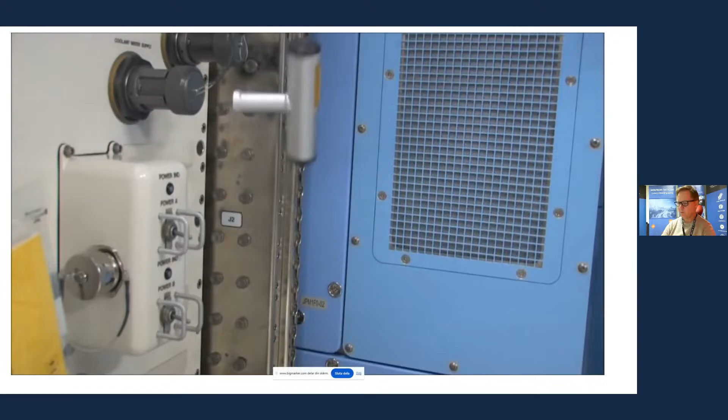This phenomenon, often referred to as the Janibekov effect or the tennis racket theorem, has been known for more than 150 years. Still, for most of us, it defies common sense. What could cause this effect? And can we reproduce this behavior?

Hello, my name is Jon Bruegel. I lead the development of System Modeler. Already as a child, I enjoyed building models. At first, I also built houses and animals of different kinds. Later, I moved on to cars, aircrafts, motorcycles. Eventually, I started building mathematical models instead of using Duplo and Lego bricks.

A few years ago, when I saw Veritasium's brilliant video on the Janibekov effect, the bizarre behavior of rotating bodies, I became curious and wanted to see if I could reproduce this phenomena in System Modeler. I will use this example to introduce the basic concepts of the software.

I actually did a recording with all the mistakes I did, so you will see that soon. My first thought was, what is the quickest way to reproduce this? The multi-body library seemed to be a good starting point.

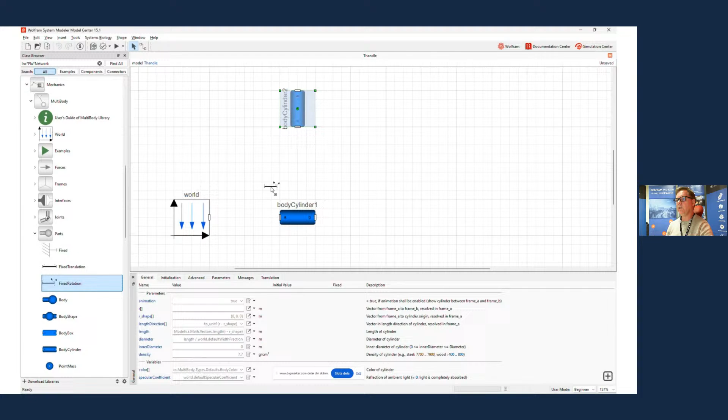Then I added a couple of body cylinders, 3D masses, that I thought together would be nice in order to get a shape similar to a T-handle. And to connect these with 90 degrees, I used this component called fixed rotation. All these from the multi-body library.

Then I started to connect the system. And that's basically it. The only thing I needed to do now was to set the proper parameters for things, like starting by setting gravity to 0, because I wanted to go to space.

Then for the handle, I decided, let's do it big. Doesn't really matter how big it is. I did it 1 meter, so that's basically a yard. And then 20 centimeters in diameter.

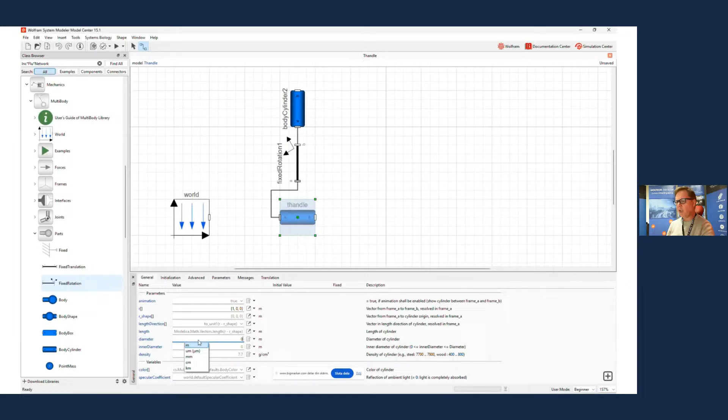Then I went over to this component that was supposed to center the next connection, so I called it center. And I wanted to rotate 90 degrees, so I got the T for the T-handle. So I rotated around the y-axis 90 degrees, and then went to the shank.

In the shank, I set it to half the size of the handle. But I think I decided to set the same diameter—we'll soon see that. Yes, 20 centimeters for that too. And then I realized I forgot to set the distance into the center, so I did that, and now I was ready to initialize the system.

So I had this T-shaped object. The only thing I needed was to get it to rotate to begin with, so I said let's get it to rotate around the x-axis with 10 radians per second.

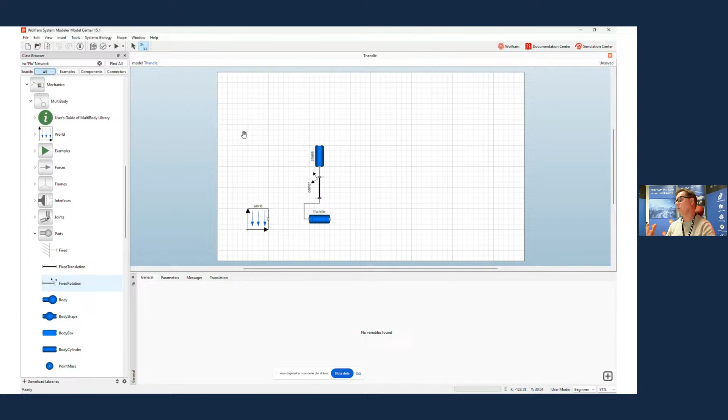And then I simulated. Once simulated, there's plenty of things I could plot—every single variable in the system is available. But what I chose to plot was the rotational speed of the shank.

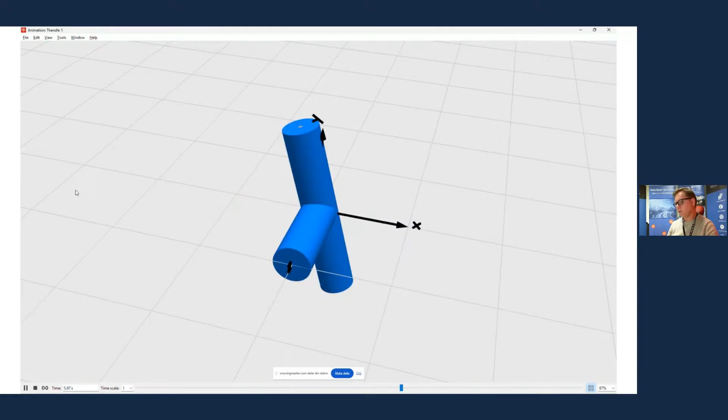So I dug down to find it, W here, and we can quickly see that something is happening, it's flipping. But perhaps it's easier to see if I run the animation. There you go—in just under 4 minutes, actually closer to 3, I had replicated the Janibekov effect.

I got excited, and soon enough I started to throw around all sorts of things: wingnuts, spacecraft, space shuttles, even cats. But then I had to stop myself and say, okay, this is just for fun—let me actually learn something. So I did what people typically do when they're trying to learn the Janibekov effect.

I did a point mass system. So let's look at that. The point mass system, when I did it, looked like this.

So what we can see here, I have 6 point masses, green on this axis here, and the weight is represented by the size. They're really point masses, but we illustrate the weight with size. So we see this is the smallest, then we have the yellow ones, which are intermediate, and the blue ones are the biggest. And these arrows—I'll get back to them.

So I started to plot different things. I prepared a bit of things here. I plotted, for instance, the rotational speed for the center around the y-axis, and x and z, and we can see that flip happening. I could also study things like the kinetic energy, and saw how that was changing for the different bodies over time, but the total was constant, of course.

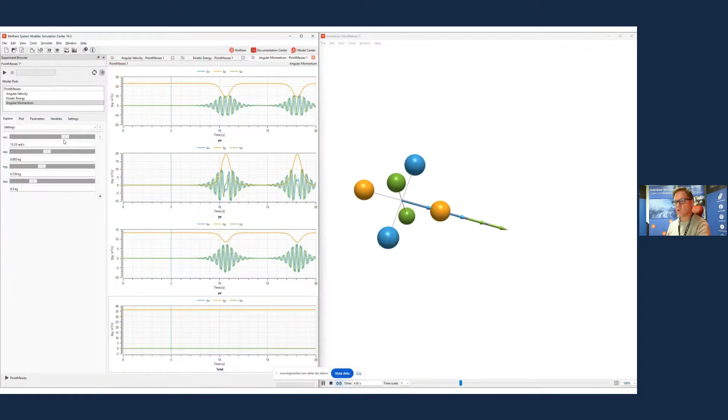And what happens if we make these three weights very similar to each other, but still have an intermediate axis? Well, then it will flip, but later on. But if I increase the rotational velocity, it will flip sooner and more, all with angular momentum maintained.

While this is a simple example, it illustrates something important: even the simplest system can behave in most unexpected ways, especially when you use it in situations where you typically wouldn't be, like in space.

It also shows how you would typically go about modeling your system, whether you want to model some simple system like this, or let's say the thermal management system of the Europa Clipper. It's almost always best to start with the simplest possible model first.

But of course, once you've invested all this time in developing an advanced model, you want to get as much mileage out of it as possible. You would like to use it perhaps for validation, for sensitivity analysis, to look at uncertainties, produce digital twins, and so on.

This is where the combination of the Modelica language, which is used in the product, FMI, and the connection to Wolfram language comes in. These together are what makes it possible to take your model to the next step.

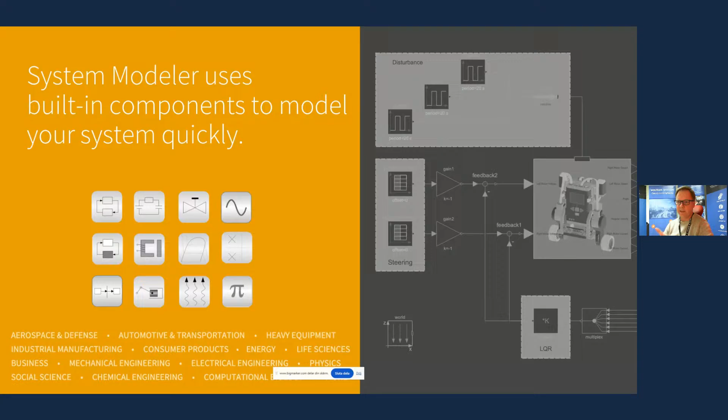So if we go back to the basics, System Modeler uses the Modelica language, which has built-in components to make it easy to get started. So just as you saw me drag and dropping there for the multi-body, there are plenty of different components for different domains.

It makes it easy to create models that you can reuse in different scenarios. Whether you want to use a motor as a motor also, or as a generator, it's the same model. You just connect it, for instance, to use it in a wind power plant.

Once you have your model, perhaps you want to do a system of systems, or you might want to do a digital twin. That's where the functional mockup interface helps you, by exporting into functional mockup units. I know we will see a bit of this during today.

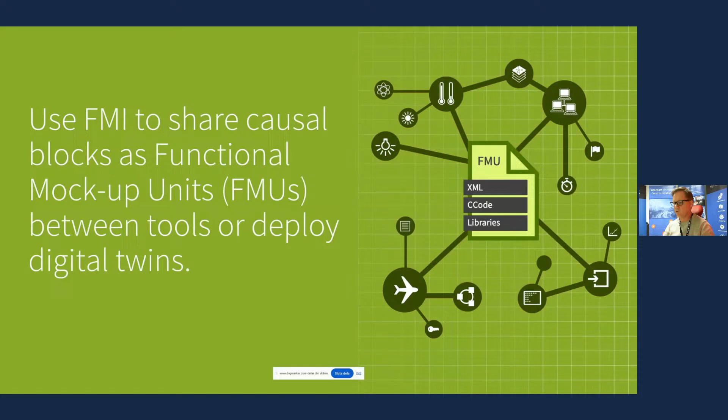So these combined, Modelica and FMI, help you develop systems like, here we have the energy system of Sweden for instance, and we can see some component of a power plant here. But you could also do a battery electrical vehicle with a battery, or a digital twin of an oil drill, oil reservoir, and so on. All this using the two technologies, mainly Modelica, but then FMI once you want to get it out there to other places, or you want to get in something from some other software.

So what happens? What about all the other questions I asked, or tasks I mentioned, like validation and so on? How would I do those? Well, that's where the Wolfram language steps in.

While System Modeler runs standalone, it's actually possible to connect it directly to Mathematica, if you have a Mathematica license, and do a lot of pre and post processing of your models and results.

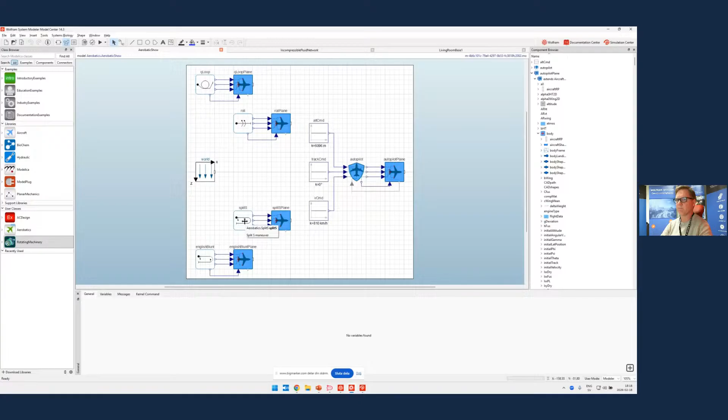I can actually simulate this, let me simulate it again, to make sure that we have the right one running here. So here we simulate this scenario for all the aircrafts, and let's look at how it actually behaves. And there we go.

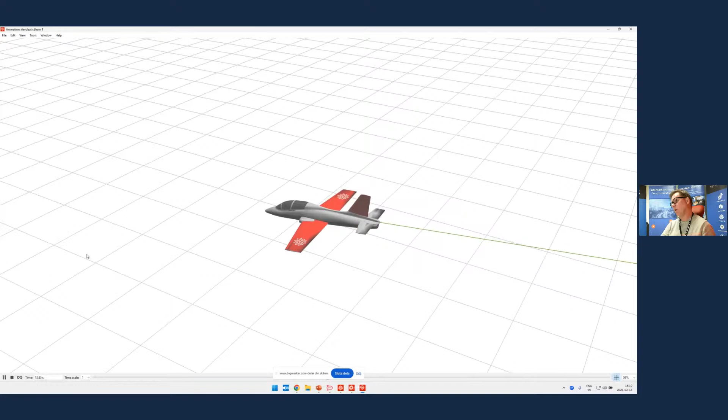We're following an aircraft that is doing a roll, apparently, not the split S aircraft. But this way we can see how it's actually maneuvering around. But do we know that they're actually doing things within the given limits? Well, we're not saying anything about that here. So let's close this, go back to the notebook.

And then what we will do is start by simulating here. I will do one that I call simulation cruise, after Tom Cruise, and one standard. So we have a standard pilot and Tom Cruise here, and they do the maneuver in slightly different ways.

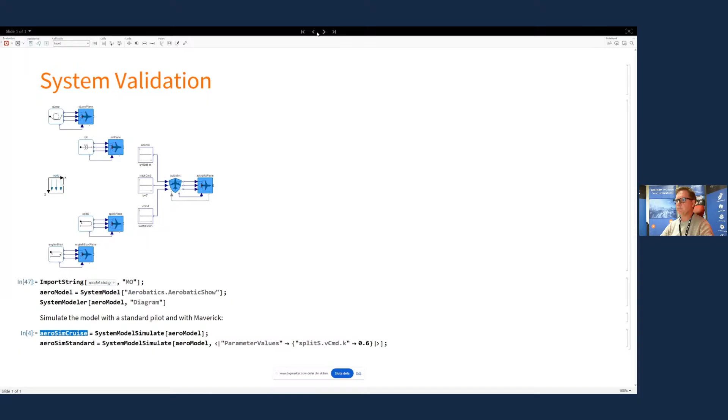What you can do is, in the Wolfram language, you can create expressions for your requirements. So for instance, let's say you have something like the load factor must be between -4 and 8 Gs for the plane performing the split S maneuver. This is just upper and lower bound, but perhaps this is actually a more complicated region, like this one, where you see that, yeah, it's -4 and 8 once you go fast enough.

But before that, you can't cross these limits. So after we have defined a region like this, the question is, can I now use this region to check whether we're fulfilling this requirement of never being outside it?

So we will use a function called System Model Always, and that System Model Always will tell us whether we succeed or not. In this case, we didn't add any probability and so on, so it was just one single simulation, but we could do that, and we'll see that later on.

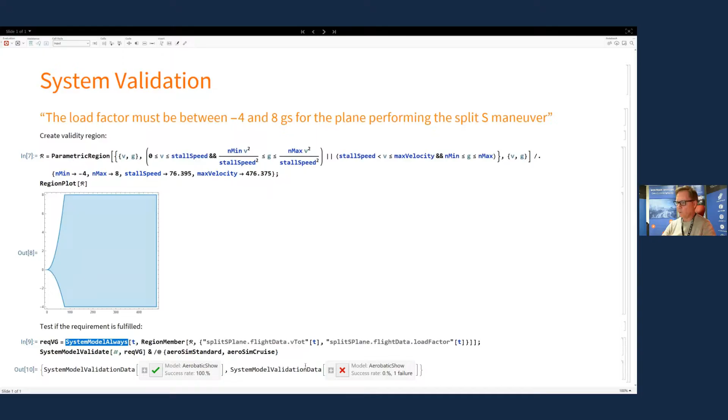So one of these, the standard, was within the limit, while Tom Cruise was outside the limits. But now, of course, you want to see this. Where did this actually happen? Now, let's say you get a big report of different things that hopefully most of them actually pass, but those that don't, you want to study them further.

So here, what we'll do is extract the velocities for VG curves, velocity gravitation curves, for each of the two aircraft, and then plot them together with our region. Now we can clearly see that one of them, the green one, which is Tom Cruise, goes outside the limit. He's pushing it a bit too much. But being Tom Cruise, we know it's okay.

While in the zooming in version here, we see that the other pilot just goes close to the limit before he returns.

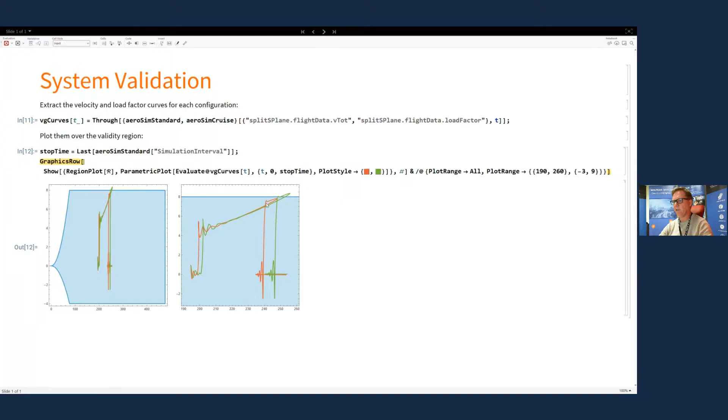So from validation to uncertainties. Most systems, you don't know everything perfectly well, right? There could be different things. So if we have this system here where we have a bunch of pipes and valves and so on, and we want to study that under uncertainties, we can do that too.

So you can design a parameter here that could be, in this case, we're saying this parameter is within this interval. But this could be any expression. It could be a normal distribution or any distribution you want. You say, this is where my parameters, how to define them. They're not one precise value. They could be any of these according to some distribution.

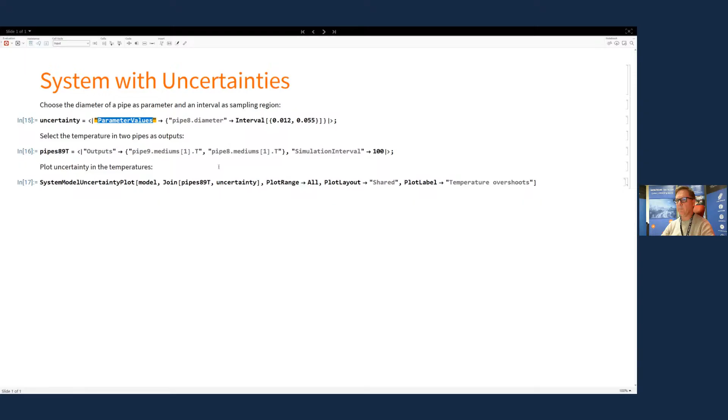And then I'll ask for a couple of outputs here, and let's see what happens. We get something like this that shows what's the median, and what's the actual spread of this. We see that it's quite huge with the distribution we set here. And we're looking at the temperature in two different pipe sections, basically, in this one. So this way we can get a better understanding of how the system will actually work with the uncertainties there is in the system.

Sometimes, so system model is about, you do a mathematical model that with all its simplification, you at least hopefully know what you simplified and the precision you have and so on. But sometimes a neural net is better. Perhaps you only have a bunch of data and want to do a model for that, and you want to integrate it with the rest. Then you can do that.

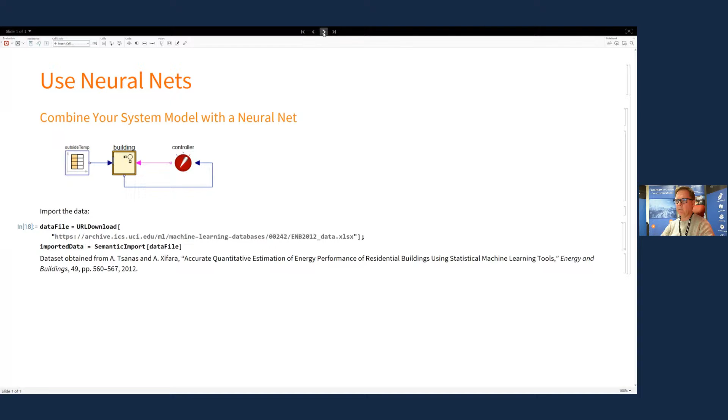Let me just skip forward here a bit, so we have a bit of time for Q&A. But we can see here within the Wolfram language, you could retrieve data, and then once you have gotten your data, you can say, okay, let's use part of the data to train, part of the data to validate. Let's design the neural net we want. In this case, using rectified linear unit layers, and then a method and so on.

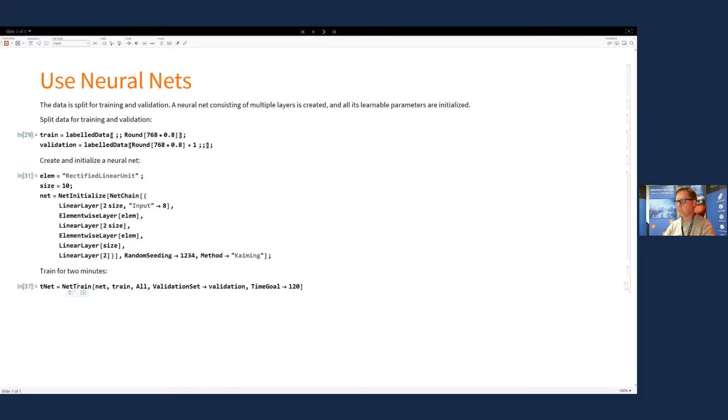And with that, we can do net train. So let me run net train here. Now we are training this neural net, and we can see here the cost function going down. The orange one is the training set, and the blue one is the validation set, which of course is varying more because it's the validation set. But eventually, it's hopefully happy. I'll set it to run for 120 seconds here, but let's stop it now.

So now when we have trained a neural net in Mathematica, we can actually use it within System Modeler. So we generate here a net chain that, with Create System Model, we put it on as a model that we use within System Modeler itself.

Right, and that takes some time, so I shouldn't have run it, perhaps. So there you see, it's coming actually. Let's open again. So here we have a model. I have a missing component, but we can see that we have this neural net that we created, and I can use it with drag and drop as a part of my actual current system.

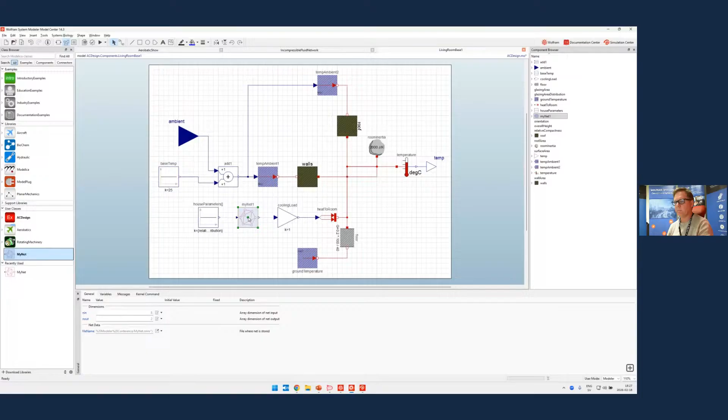And this I can do in any direction. I can use my system model to train a neural net. I can use a neural net as part of my system model and so on. Hopefully that very quick introduction shows a bit of how System Modeler is. You begin with drag and drop, simulate, get some understanding, and then depending on where you want to go, you can use the Wolfram language to get deep down into validation, for instance, or looking at uncertainties and so on.

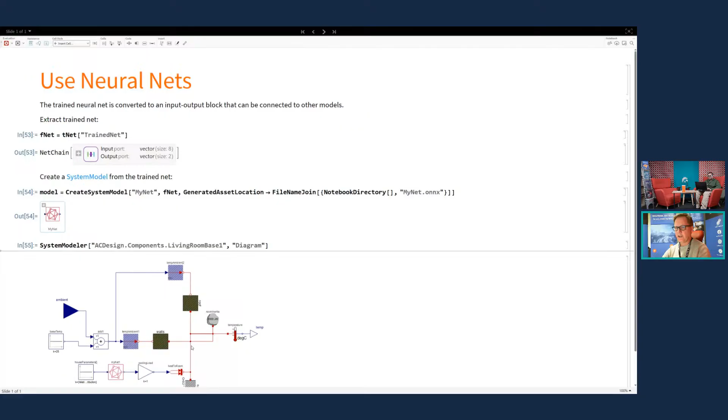I think there's a good starting point. Let's see if I can open a web page quickly here, on Wolfram.com, System Modeler. We can find it on the resources, and then the core components section. So here are basic Modelica, for instance. Let me click on that, and you will get what is Modelica, why should I use it, and from there it will point you to other resources, including introductory courses and so on. Similarly for FMI and the Wolfram language.

The next question was, what did you mean by causal blocks? People think that Modelica is only for acausal blocks, so can you make that a bit clear? Modelica doesn't care what's input and output, which is called acausal. We don't care when we build the component how we will use it, whether we will apply voltage or current to it. That is decided when we actually use the component. However, in many other software, you need to define this is my input, this is my output, and that's a causal thing that says okay, this causes that. This is why FMUs, the functional mockup units that you export, are causal, because they need to work even in tools that do not have the capability to handle acausal systems.

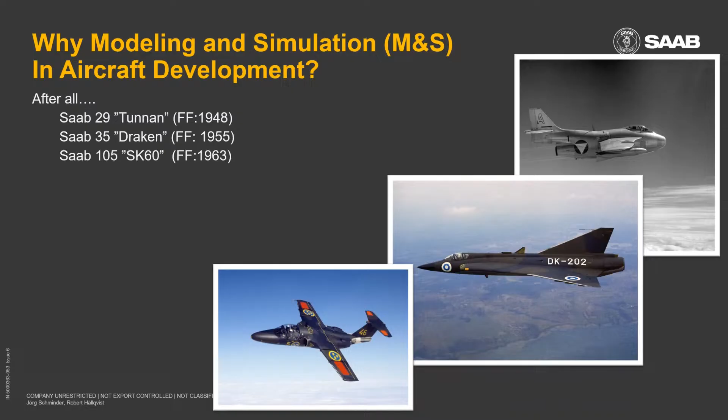Before pointing out what has become different, let's just use general vehicle systems as an example. These are general vehicle systems, which both I and Jörg work with—general aircraft subsystems that exist in both military and civil aircraft: cooling systems, hydraulics, fuel systems, etc. Nowadays, we classify propulsion systems also as a general vehicle system.

Today, they typically consist of both complex hardware and software parts. They are tightly integrated with the aircraft as a whole and highly connected to one another. Each subsystem is designed to solve a number of different tasks. And this is largely one of the reasons why we need to use modeling and simulation during development, in order to not only cope with emergent behavior that arises when these different subsystems interact, but also to exploit them to make a better product in a safe way during development.

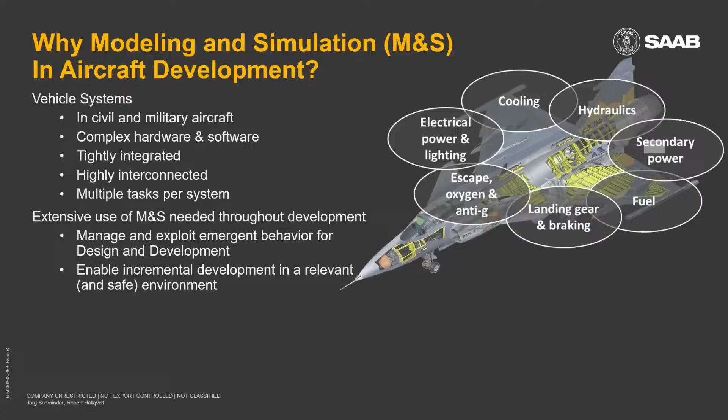So when using models for development, we adopt a distributed approach. And with that, I mean that the models are developed by the parts of the organization that are responsible for also developing the subsystems. The engineers developing models can be spread throughout the organization, and they are prompted to use the best suited domain-specific tool at hand to develop their models.

We strive to make simulations, models, and simulators available to all engineers that need them throughout all the life cycle phases. And we employ modeling and simulation on an increasing system level throughout development, ranging from component to subsystem to aircraft and systems of systems in the end.

Here we have a schematic representation where I put some sort of abstract measure on the vertical axis representing level of integration—so, in a sense, how many of the different subsystems are integrated in the simulation. And on the horizontal axis, we have some abstract representation of time. Here I wrote early phases and late phases. That does not mean there are no even later phases, such as operation—this is an undefined boundary, I should say.

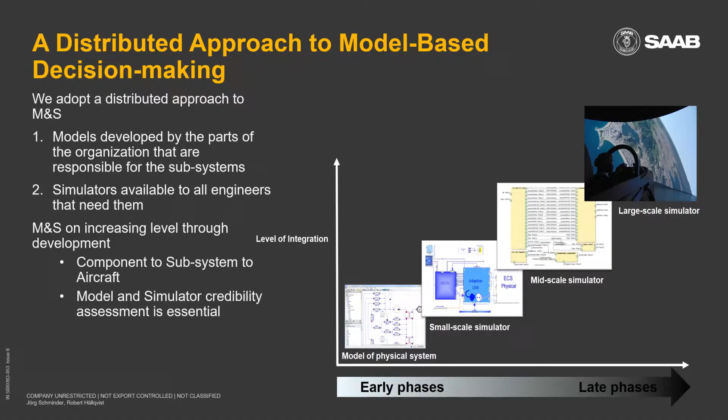But if we are to work this way, then credibility assessment as an umbrella term becomes essential.

So when developing a new aircraft vehicle system, we typically start by modeling the included hardware. And I myself, I am a Modelica proponent, so I would develop this model using Modelica and various different Modelica tools. But as I mentioned earlier, we strive to use the best suited tool for the task at hand. So when developing this model of the hardware, we do a lot of simulations to mature the model and to specify the hardware to be included in the subsystem and so forth.

We use this model for safety assessment, performance analysis, load analysis, etc. Here I try to indicate that we are using the model throughout the lifecycle phases. In the late lifecycle phases, we heard Jan talk about digital twins, and this would be a potential digital twin prototype in this early phase.

Once we feel that this model is mature enough, we develop a corresponding controlling software, and we integrate the hardware model together with the software in what we refer to as a small-scale simulator. When I say simulator here, I mean the complete architecture, including the models, but omitting the actual simulation engine, the tool driving the simulation forward in time in case of time domain type simulation. So here we have a small-scale simulator incorporating the hardware model and the software of a single subsystem model or of a single subsystem.

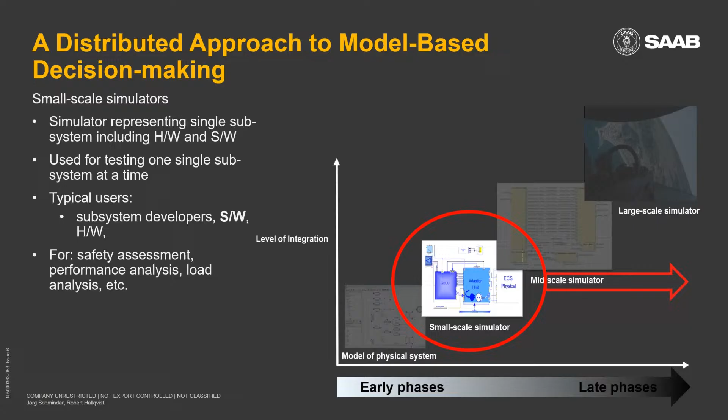We use this type of simulator for the same purposes as the hardware model, to develop the models and the software, to do safety assessment, performance analysis, etc. We run a lot of simulations, and once we're mature here, maybe we develop a mid-scale simulator where we incorporate several different closely related subsystem models and their corresponding software. We use this, for example, for architecture evaluation on a higher system level and a more holistic performance analysis. And lastly, we go to our large-scale simulators.

These include most of the modeled aircraft subsystems. We have an ambition to be flexible here. We have full desktop type large-scale simulators, as well as hardware in the loop simulators. These types of simulators are typically used by pilots and a number of different subsystem developers, and they are also shipped as products for training purposes, etc. But in-house at Saab, we use them typically for integration testing, fault analysis, and evaluation of the behavior of the complete aircraft.

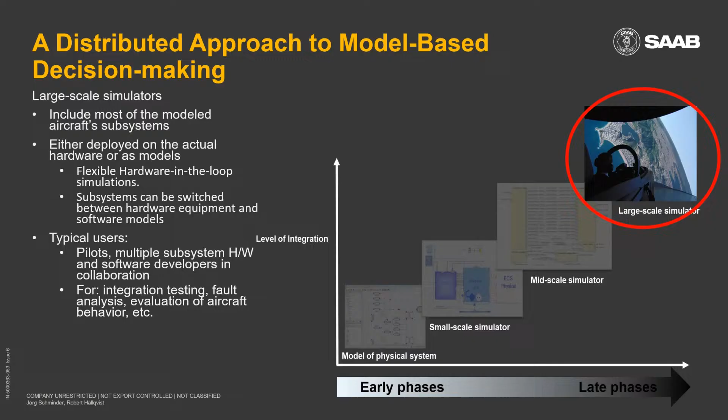So with this very distributed approach, we need to have tools, methods, and processes to enable efficient reuse of all the digital artifacts that go into these different simulators. Some of the strengths are that the subject matter experts have direct input on every digital artifact, and all of these subject matter experts are typically dispersed throughout the organization. So this distributed modeling approach is a prerequisite for this to work.

Using this ambition to let the engineers work in the best suited domain-specific tool enables an efficient use of human capital, in the sense that a modeler can switch between development projects without having to switch or learn a new tool. So this is also very important in this approach.

As I mentioned, we do need mechanisms for efficient distributed credibility assessment, meaning credibility assessment as an umbrella term. To realize this, we need to use well-established interoperability mechanisms, standards such as Modelica, FMI, and SSP, which I will talk about in a little bit. And we need to have mechanisms to establish and communicate digital threads. As we use these large-scale simulators or products, we need to be able to declare them as test-worthy.

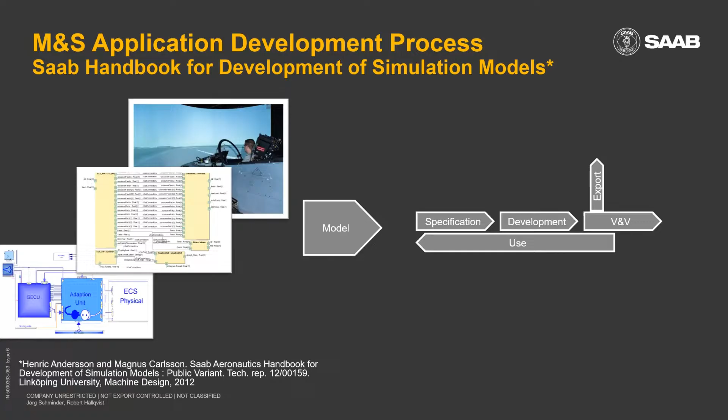We formulate a verification and validation plan, etc. Then we go into the actual model development, where we connect component models into a subsystem model. We do verification and validation. We get feedback to refine our specification, and once we're ready, we export the model to a central model storage. Once in the central model storage, this model can be integrated in a simulator at whatever level. At this very coarse way of describing the process, one could express the development of simulators in the same way as well as component models.

Jan mentioned FMI. FMI is very important in this workflow. FMI is a result of the EU-financed research project MODELISAR, as far as I know. Basically, FMI specifies a generic format for export of model executables, or so-called functional mockup units. This can be done in a few different ways: FMUs for co-simulation, where a numerical solver is incorporated into the model package, or FMUs for model exchange, where the solving of the equations is left for the integrating tool.

And it provides various means of protecting IP in different ways, in terms of source code export, gray box, black box, etc.

FMI also provides a standardized interface description in terms of an XML schema. So FMI targets this export step of exporting models for integration in simulators. But we had what I refer to as simulators on various different levels.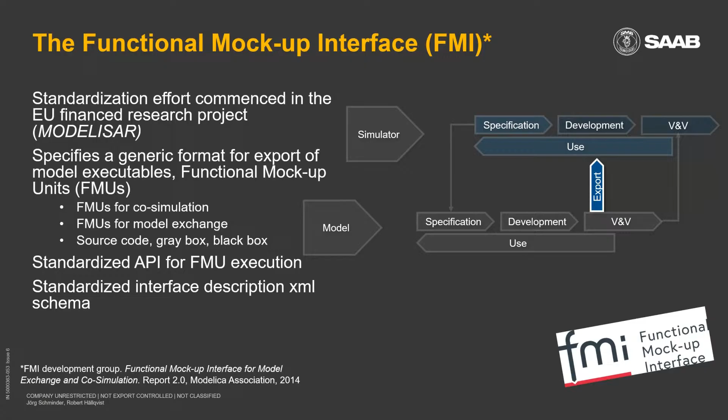And that is, for example, one aspect that the system structure and parameterization standard addresses. SSP is a portable zip file format, just like FMI, that contains everything needed to execute such a simulator.

Just to advertise the latest version of the standard, SSP 2.0 was released slightly less than a year ago. This latest version is primarily intended to keep up with and address FMI 3.0 functionality, but it also provides some nice mechanisms to support incremental development of simulators and architecting.

In SSP, we use 3 of the primary artifacts that SSP specifies. We use the system structure description file format, which captures simulation architecture, how one model is connected causally to another model. The system structure values file format, which is a container for parameter values. And the system structure mappings format, which is a file format that allows you to customize the mapping between values and model components.

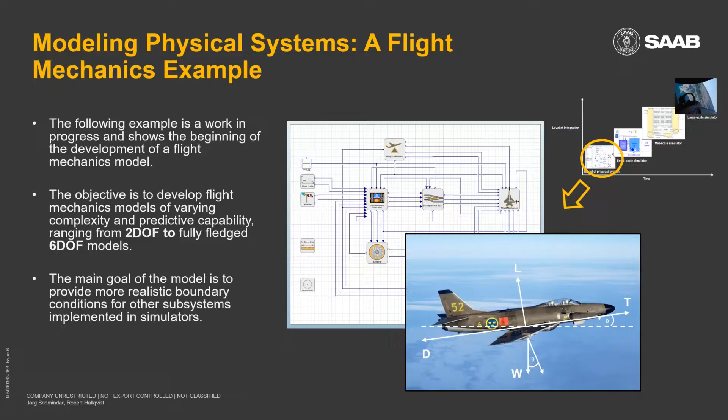So if we go forward please, Robert. Next slide, yes. We are working at our department, like Robert mentioned already, with system simulations. However, what he didn't mention is that our focus is very much also on conceptual design of these subsystems.

And here we are working very closely with our colleagues from the aircraft conceptual design department. And why I mention this - they are actually designing, you could say, the outer part, while we are designing... what does this mean? When we look at military aircraft, you see...

Jörg, you're cutting out. We lost your audio. Can you hear us? Hello Jörg, we are not hearing Jörg, Robert.

That's actually what we try to achieve with this model. So what we are doing is we're building up... there we go, was I away? We lost you for a little bit, Jörg. Okay, sorry.

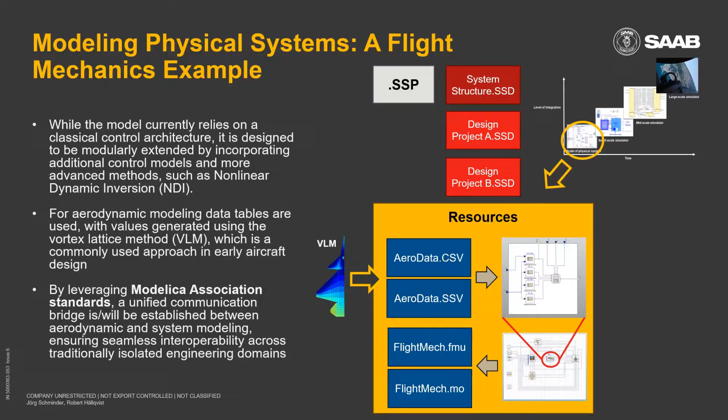So what we have in the current model is a very simplified engine model. However, later we want to have a model providing much more precise, more detailed data than what we have now.

And what we can use here is the same approach on the engine side. You can have different engine designs, engine design A and B, and all these models are using the same structure as we are doing with the flight mechanic model.

What you can do is use, for example, the engine file exported as an FMU in our flight mechanic model instead of the current model which we have implemented at the moment. So that's basically the idea, and hopefully that gives you an idea how we create this modularity and how we want to share files within this simulator which we're developing.

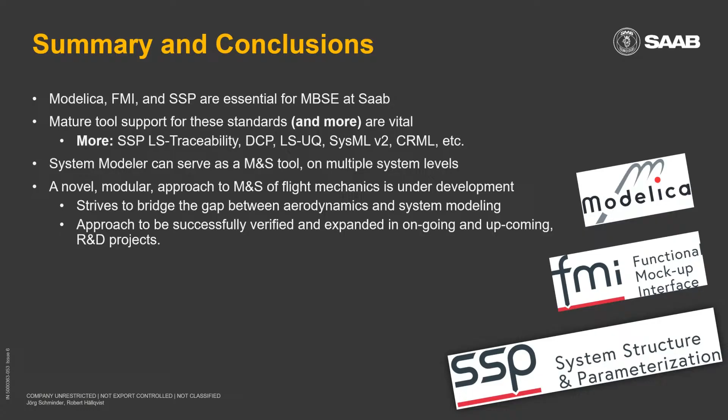No, I think we're a bit short on time, so I can wrap up with a brief summary. Our goal with this presentation was to highlight the importance for us of Modelica, FMI, and SSP, and the Modelica tools supporting all these three standards, such as System Modeler.

There are other standards that are very relevant, emerging quickly under the Modelica Association. For example, the digital thread, and the SSP traceability specification, which provides really nice mechanisms for this.

We see that we can use System Modeler on a number of different system levels, so that is great. And also, what Jörg showed is a novel, from our perspective, modular approach to modeling and simulation of flight mechanics. The idea is that we really try to bridge the gap between aerodynamics and systems modeling.

And our plan is to successfully verify and expand on this approach in both ongoing and upcoming R&D projects. Thank you. Any questions, if we have time for that?

Thank you, Robert and Jörg. It was inspiring to see how models are used across so many different teams at Saab, enabling collaboration across diverse domains. We don't have time, but I had one question I'm very eager to ask you.

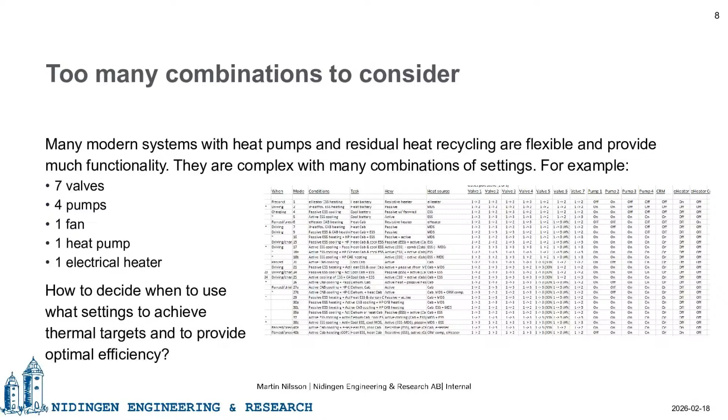So what to do? Well, if you look at all these details at once, you quickly become very lost, very quickly.

One solution is to segment the model buildup, meaning you have different levels of detail in your model for different project tasks or phases. I don't build one model of this particular thermal system for this particular vehicle—I build a family of models which I use, and I use different members of this family for different tasks. Usually the simpler models early, when you have more concepts to develop.

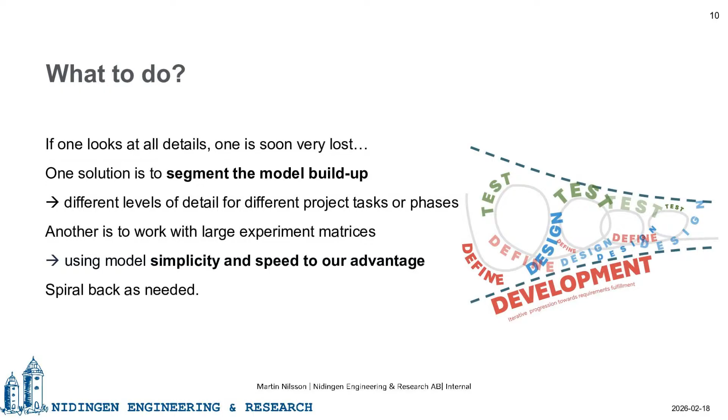So how did we do it? We created 2 new fluid libraries because I work with thermal systems - a lot of fluids, coolant, liquid, and air, incompressible air in this case. So we don't have to do any fancy stuff for compressible flow, high Mach number fluids. We created 2 libraries, and decided to call them thermofluid and flow. The names are almost arbitrary.

We created them from scratch. We had a new interface definition. We created new media models based on the structure we wanted - I will show you some examples. We created a full set of components.

As a design principle for these libraries, we used limited extends in Modelica. You can extend forever if you want, but we use limited extends, and we don't use very many partial models, which goes contrary to the software engineer's thing that you should reuse, make maintenance easy, and bug fixes only in one place.

Since not everybody will be expert users, we created these models from the perspective of ease of understanding and ease of reviewing. If we introduce a bug, it's possible with this approach it will actually be in multiple places, but most of the code is very similar in each component, so it should be easy to find. We do that because having an overview of almost the complete model at once actually helps debugging and introduction to Modelica and ease of understanding this library. That's why we chose that as a guiding principle when we wrote the libraries.

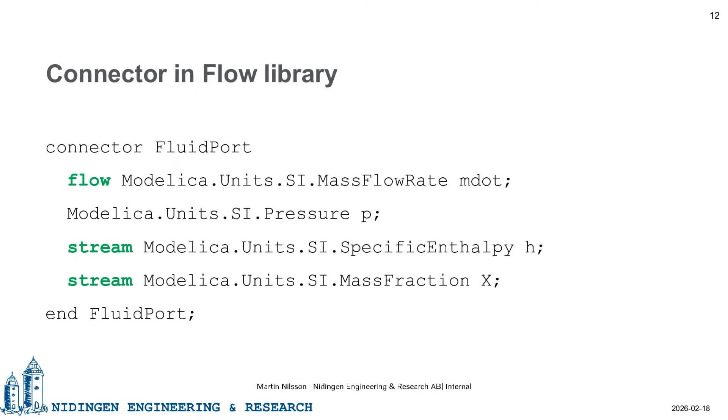But in all practicality, you can use x as almost whatever, depending on how you write your media model.

The media model is written according to this principle. We created first a template, and all functions have a name like property, underscore, and these are the input variables. For the flow library, we take pressure, temperature, and the variable x as input. Whether we use them or not, that's really not the question here - that's what each function needs to work.

And then we create a template, and then we extend that template. For liquids, we typically populate it directly with equations for the fluid properties - in our case, different versions of ethylene glycol. Some of them are hard-coded and don't use x because they're hard-coded for a certain glycol concentration.

Some have X as an input, and then you can vary very easily without changing the media. You can vary the glycol concentration.

For ideal gases, we did a little different approach because a lot of gases you can use the same set of state equations and just change the coefficients. For example, when you define viscosity, you use Sutherland's law, and they have the same type of coefficients regardless of the gas, if it's nitrogen or air or hydrogen, for example.

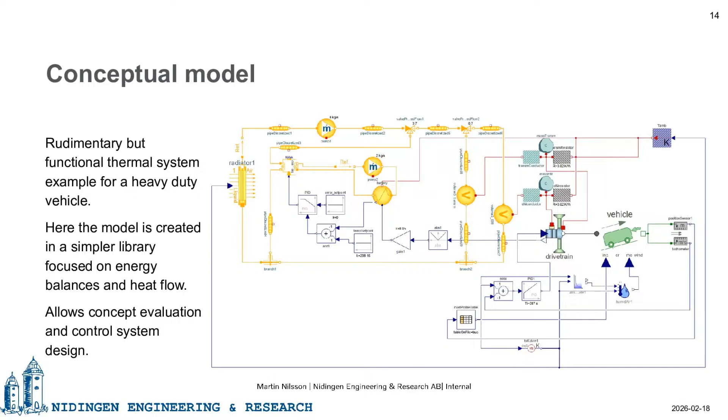This conceptual model I ran in a drive cycle, because I have a drivetrain and a vehicle model, so I can evaluate in a drive cycle. It does require that I first created a conceptual control system, because otherwise my thermal system won't work. Without the control system, it will work in manual mode or steady state modes only.

So before we actually do the drive cycle, we create a large test matrix with thousands of points, and then we do something called a system characterization, or I create data and hand it over to my control system team members, who use that to perform a system characterization, often using Simulink, who has tools for this, and not in Modelica.

And then from that, they define a control system. They define the system from the control system point of view, or we decide to do a hybrid approach and maybe use this data to train an ML algorithm.

We did show in an advanced engineering program last year together with Wolfram that it was possible actually to train, using data from these models exclusively, to train an ML without any different control functions, just an ML algorithm, a neural net created in Mathematica, to control one of these systems over a 4-hour drive cycle in for various times of the year, meaning different ambient temperatures.

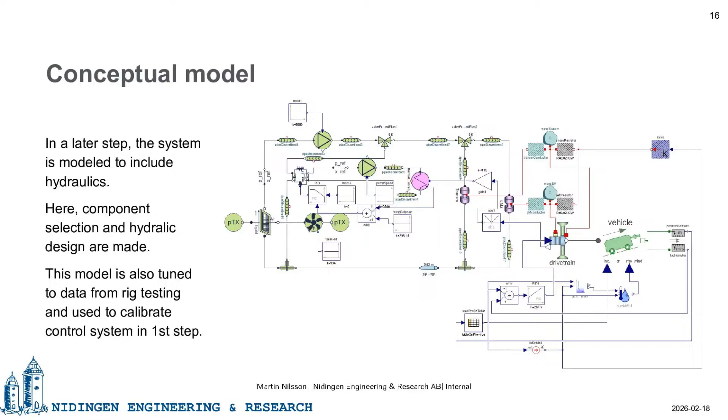So to wrap things up, to provide a couple of minutes for questions: no model is perfect. So we utilize a stepwise approach, a tiered approach if you want, where we add detail as we go along and as we go back and forth. You can see it as a pendulum or as a spiral, in my view.

First, to down select concepts, we run huge DOEs, tens of thousands of cases. We haven't really gotten to tens of thousands yet, but maybe 1,000 - that's where we've gotten so far. We're developing a new workflow as well, to do system characterization, train algorithms, or something else. And we add detail as we go, and then we start all over.

Thank you very much. I'm ready for questions if you are, on the Wolfram side.

Thank you, Martin, that was a very interesting presentation. We have a question: why did you make a difference between energy flow and heat flow in your slide?

I think that was just a wording thing. What I convect - if you mean in the yellow library, or actually the green one as well, the flow library - what's being transported is enthalpy. And energy can be heat, if you put it that way.

So we'll take a simple case. We will have a low tank receiving flow coming from a sewage network, so wastewater flow, very variable. We want to bring it to a wastewater plant located higher, but we don't want to bring the whole flow there. We want to bring up to 2.2 cubic meters per second. The excess flow, which happens usually during rain, we will send to another treatment, which is a bit lower.

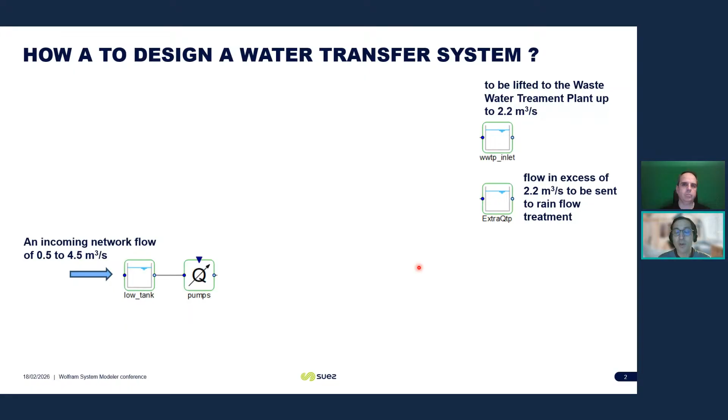For this, we need some pumps to lift the water. We need a pipe network. We made here a long pipe, 2.5 kilometers, and some short pipes here. We need something here because most of the time we want these circuits to be closed. Only when there is the rain peak flow do we have water flowing through this circuit. So we need a control valve.

At this stage, it looks like a Modelica System Modeler diagram, and it eventually is. At this stage, it's not real pumps or real valves, just ideal flow sources. So we have, I would say, a kind of architecture, but not a design yet. And Pedro will tell you more.

With these simulations, we can address one of the most critical design decisions in water conveyance: the selection of optimal pipe diameter, pumps, etc. This decision is inherently multi-objective because it's a balance of competing criteria like hydraulic performance, construction costs, environmental footprint. For instance, in hydraulic performance, if pipes are undersized, head losses increase, discharge pressure at the pumps rises, energy consumption grows.

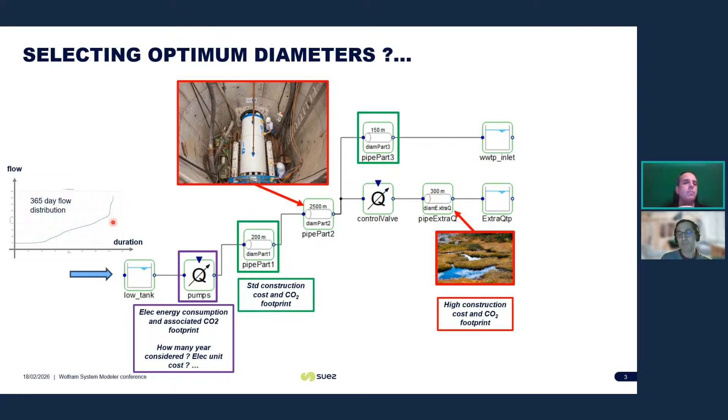Talking about multiple objective optimization with System Modeler: to select the optimal diameter, considering all these inputs, we use System Modeler coupled with Mathematica. The model includes a time-dependent flow table, which we already saw as an object, representing the long-term flow distribution. This flow profile feeds both the pumps and the control valve mentioned previously.

We then load the simulation into Mathematica to run the model thousands of times using an automated optimization workflow. The objective function minimizes TOTEX, which includes CAPEX (construction costs), OPEX (operational costs, mostly energy consumption), and CO2 footprint. This is a multi-objective optimization problem solved through parametric sweeps and search algorithms that converge towards a Pareto optimal solution.

The resulting optimal design is, well, it's kind of obvious and at the same time interesting. The long micro-tunneling pipeline on this example converges to a small diameter because of construction costs. On the other sections, the lower differential cost converges to a larger diameter to reduce energy consumption. So it finds the balance in an expected way on this example. Moving forward.

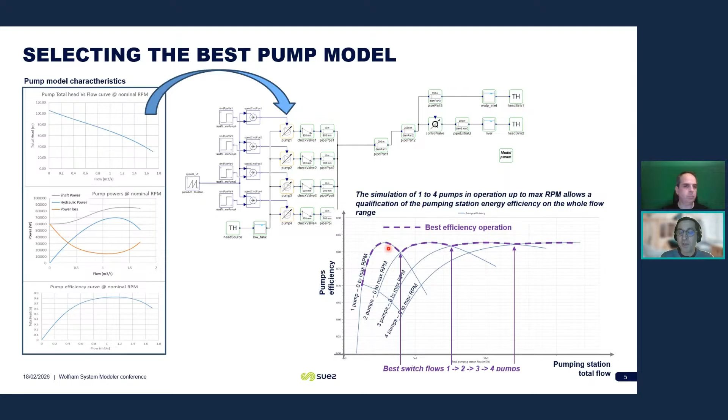So now we have a pump model. It's quite okay. We are quite happy with this efficiency.

After selecting pumps and pipe diameters, it is typical to perform transient analysis on the system. We simulated a critical scenario, typically all pumps running at full speed and a sudden stop due to power failure. For this presentation, we use a simplified rigid column model, not elastic pipe behavior, but we do include pump and motor inertia behavior. The pump, at a given moment, becomes a dissipative element after shutdown.

The results show that immediately after power loss, pressure downstream the pumps, shown in red, drops rapidly from about 6 bars to subatmospheric pressure. This occurs because the 2.5 kilometers of water column moving forward along the pipeline has strong inertia, so water continues moving while the stopped pumps become a restriction in the system. This can lead to pipe collapse.

Unfortunately, it does happen. Pipelines are quite robust against pressure from inside to out, but when submitted to negative pressure, it's quite easy to implode them. So this is a major risk that we must mitigate.

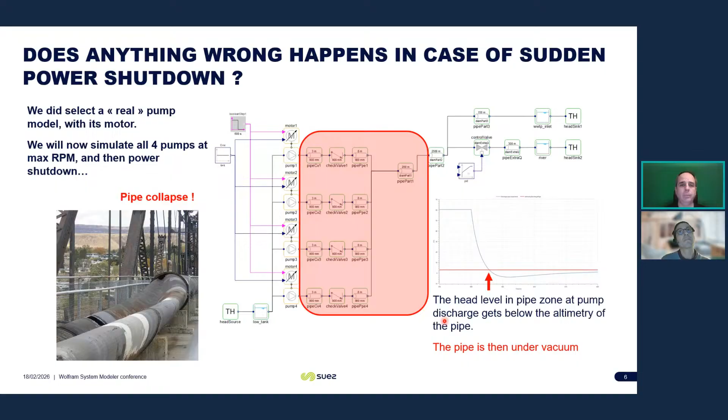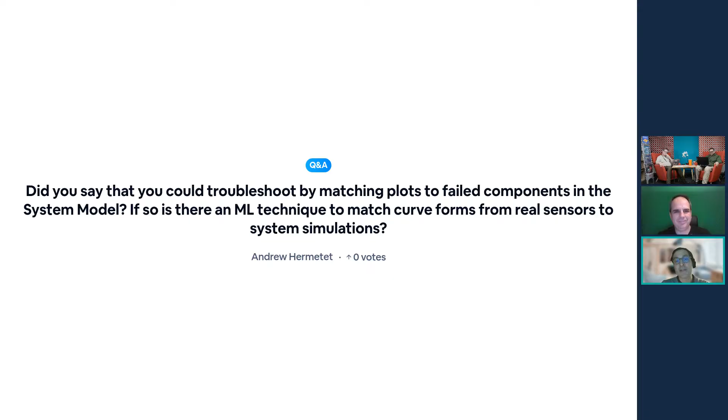We did not try that at all yet. It would be interesting actually. These days, I would say we are designing plants with these systems. These plants will be built, but it always takes time - several years for the project to be built and commissioned. In a few years, it will be very interesting to compare if what we did during engineering phase matches the reality of the site and recalibrate things. But at that stage, we did not do that yet.

Right. And which criteria did you use to place your surge tank on the right of the pipes or to the left? Well, Pedro, maybe you can answer this question. Yeah, I was typing it right now. I mean, the location, if you mean the location.

It's common engineering knowledge from water hammer transient analysis that we should continue the supply of water closest possible to the point where there has been a shortage of water. So in this sense, it's to approach the vessel to the pumps, which are the elements that change their condition upon power failure. If we place it further away, we are going to have the phenomena developing until it finds the vessel, and so we end up with two oscillation systems, one upstream of the vessel and another one downstream of the vessel.

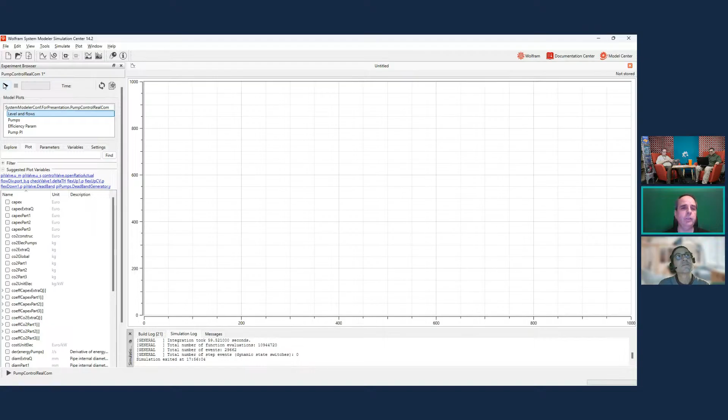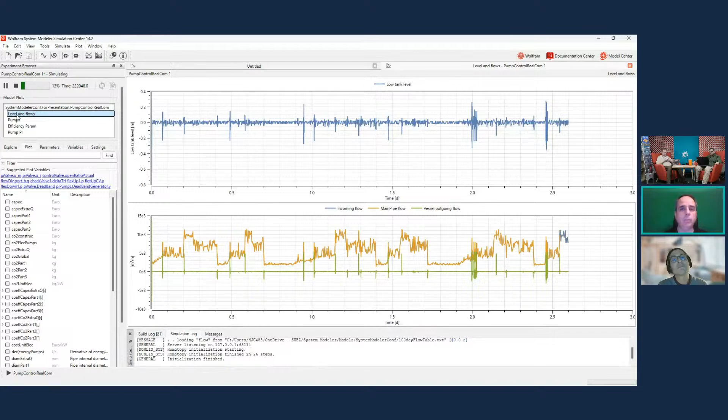So in a sense, could I put it like this, that you are using notebooks as playgrounds for other users? Yes, well, other users - the community is very restricted, so we don't have a lot of multiple users. But yes, it opens the possibility, as you said, to use it as a playground to operate on the models as, let's say, a power user.

I had a thought you could easily use Wolfram Language to identify some thresholds. I see your plots have so many fluctuations, and if you want to automatically identify which set of parameters are within a threshold and which are going out, so you could easily find those scenarios. Do you use some kind of workflow for that, to automate validation of your systems?

We did, most of the time. Actually, we look at the plots and we find quite quickly the issues. But we did things where we wanted an automatic optimization with Mathematica. And then, of course, we need to define a variable that represents the bad thing. This variable is typically an amplitude of oscillations or anything. We have to quantify this thing we don't want, to ask Mathematica to minimize it, working on all the parameters.

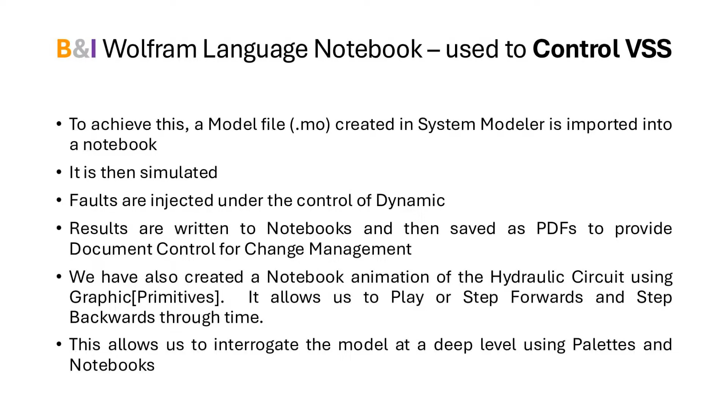The B&I validation solution led us to what we believe is a novel and important concept using digital twin instances. The ISO definition of validation can be boiled down to the question: how do we know the system fulfills its intended function? That is, does the system do what it is supposed to do?

Validation is normally conducted by review, factory acceptance testing, systems integration testing, and commissioning. But what if we could extend validation into real-time operations?

We therefore built our service around the notion of simulation for verification and Sentry for validation. Both use the same basic virtual system simulation, but this time the Sentry is connected to the actual thing, allowing us to validate in real-time, which changes the paradigm.

In B&I simulation mode, we use the standalone VSS. It enables us to conduct design iteration, performance optimization, time-stamped fault injection, reliability and sensitivity studies. In addition, it supports operator training and real-time diagnostics.

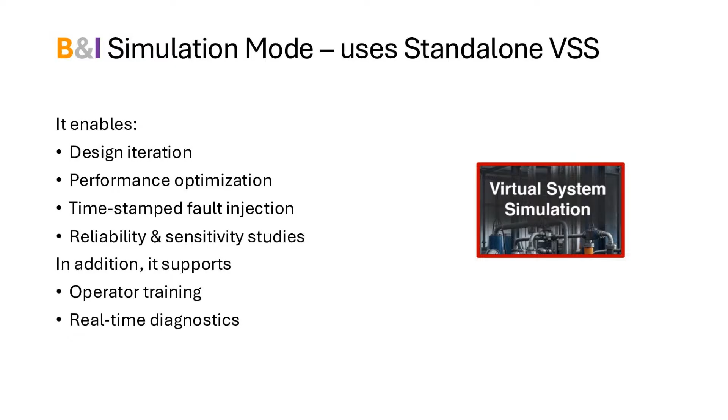In B&I Sentry mode, we use a modified version of the standalone virtual system simulation. Synchronization is achieved by embedding a Wolfram OPC UA client in the VSS, which allows us to ingest live data like valve positions, pump speeds, pressures, and so on into the model.

This allows the operator to conduct real-time validation, for example, by comparing actual sensor data with our digital twin predictions. This means we can detect and alarm anomalies in seconds, both locally at the rig and in a real-time operations center.

So the challenge is: could B&I build a technology stack capable of meeting the following requirements? We need to do parameter synchronization of valve positions, pump speeds, and so on, and system state representation, which must allow us to simulate nominal and fault states.

It should visualize the hydraulics and mechatronics using 2D animations, allow bidirectional simulation communication, analyze system performance, and auto-report when deviations occur, and it must generate actionable insights.

We must also be able to deploy multiple instances in parallel on our client's network, and finally we need to aggregate, analyze, and visualize fleet-wide big data from the simulations and from the actual systems.

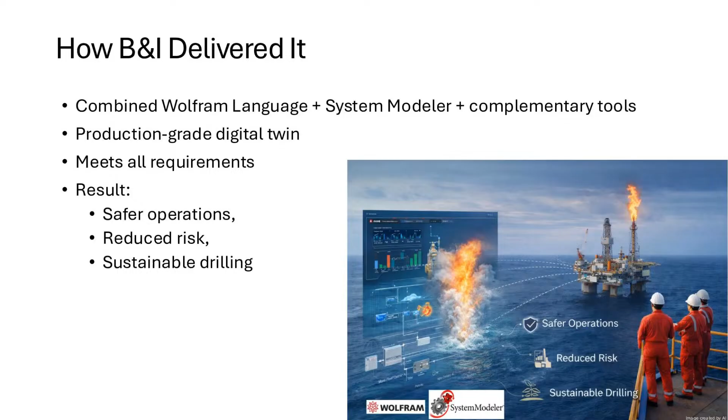So up to now, I've described what's required, but the next few slides presented by Konstantinos explain how we developed and delivered a client-facing solution that will be deployed either as a Dockerized product installed on the client's network or perhaps as software as a service. We combined Wolfram Language, System Modeler, and complementary engineering tools like .NET into a production-grade digital twin platform where Wolfram Language sits on top as the orchestration and analytics layer, handling automation, fault injection, reliability calculations, reporting, and parameter studies. The outcome, we believe, is safer operations, reduced risk, and more sustainable drilling practice. So I'm going to hand over now to Konstantinos.

This model must be computationally efficient and numerically stable when operating in simulation and sentry modes. To verify the model meets the requirements, we validated simulation results against system integration tests for normal operating scenarios. After understanding the failure behavior, we performed optimization and calibration. We adjust parameters, test sensitivity, and evaluate how robust the system is against uncertainty. Our ultimate goal is to use the new tunability analysis framework in FMI.

We have found that a critical step is initialization. The model must start from a steady-state condition with no artificial dynamics. This systematic approach to build, simulate, verify, optimize, and calibrate transforms a model into a safety assurance tool.

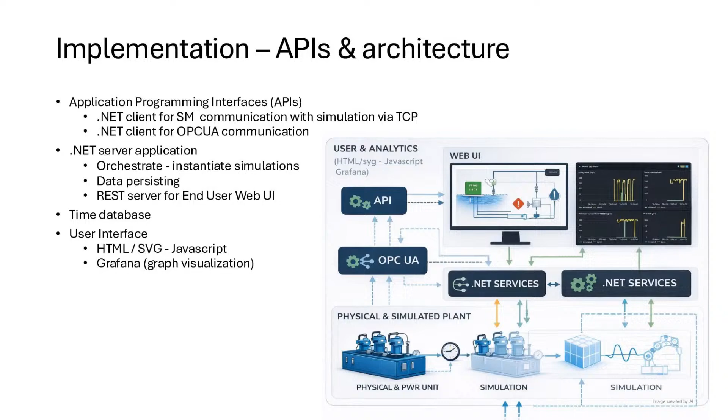When they begin to diverge, even slightly, the digital sentry detects the deviation immediately. In parallel, we have live dashboards providing analytical insights, trends, and statistical deviations.

The final step now is deployment. A digital twin is valuable only if it can run reliably in an operational environment, not just in a development machine. For this reason, we deploy the platform using a Docker container. The twin runs the same way in development, testing, and production.

No dependency conflicts, no configuration drift. From an operational standpoint, Docker enables scalability. We can deploy multiple instances per well, per rig, or fleet-wide.

In Sentry mode, the containerized twin runs continuously alongside the real equipment. It ingests live data, computes expected behavior in real time, and triggers alert when the deviations exceed defined thresholds. Because it's containerized, it can be deployed offshore on the rig and or onshore in a real-time operation center.

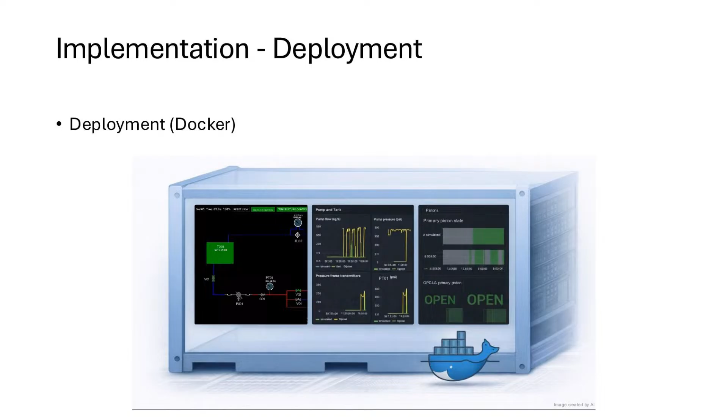Now, Robert is going to summarize all of what we have done. Thanks, Konstantinos. So to conclude, the question that we had when we started this, which was a couple of years ago, would Wolfram products deliver what we need for a client-facing product? And the answer, we believe, is an emphatic yes.

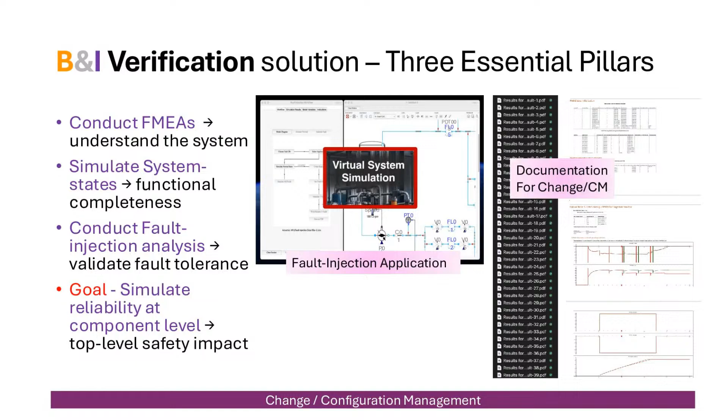So what we've shown is communication can occur with external data sources. Virtual representations can be built in System Modeler and Mathematica. Wolfram's OPC UA and TCP/IP can be used for synchronization and communication. Data is made interoperable by the use of the OPC UA standard. We also have security, trust, and governance provided by OPC UA communications. And the IoT platform allows us to Dockerize, instantiate, and aggregate the results.

So going forward, we intend to extend our applications of this technology stack to include more of the drilling services and a more complex subsystem and system. This will lead us to explore how we use FMUs in co-simulation to represent the whole drilling system. So one of the things of interest for us today is to hear from others if they have experience in this regard, so that we can exchange ideas.

So that's everything that we have. Any questions? Thank you, Robert and Konstantinos.

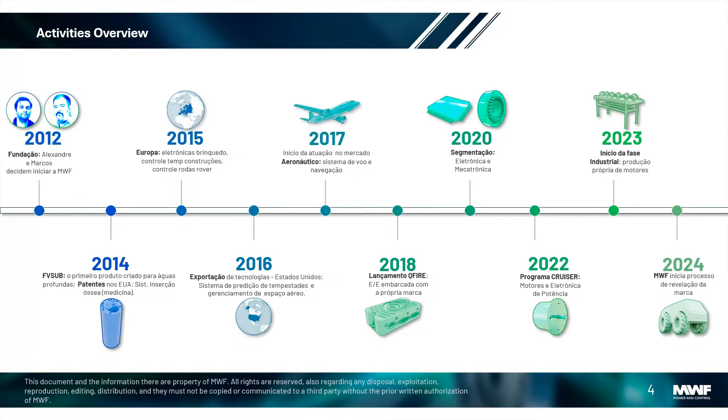So our workflow is very simple. Once we have a specific Modelica development environment like Wolfram System Modeler, we generate a compiled version of the model called FMU under the FMI standard, and we run this model in real time under Linux with a preempt-RT package. After that, we are able to interact with the system in real time through real-world signals—I mean analog signals and digital signals. And we are able to do all this in real time with a rather complex dynamical system representation.

This is one of our platforms. We call it QFIRE HIL. As you can see, it has inputs and outputs for real-world signals, both analog, digital, and also digital buses like CAN bus, which is very common in agricultural machinery and commercial vehicles, for example, or even maritime applications and many others.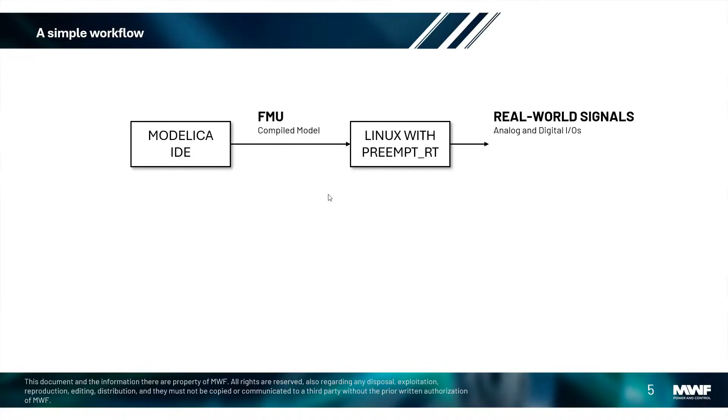The Aquanaut library has models for vessels in the presence of waves, ocean currents, wind, and many other interactions with different actuators like thrusters, rudder, bow thrusters, and so on.

The Heavy Dynamics library is mainly devoted to commercial vehicles, but especially commercial vehicles driving on hard soil. Another version of this library was developed also for soft soil and interaction with rocks and so on. I'm going to mention this very briefly, but this current version is dedicated to the simulation of heavy vehicles on hard soil.

PMSMC means Permanent Magnet Synchronous Motors Control. This is a library that models accurately PMSM motors and generators and are able to help the designer to design specific control systems, design inverters, check the short period dynamics, and design other types of converters as well, like many different types of rectifiers, inverters, speed drivers, and so on.

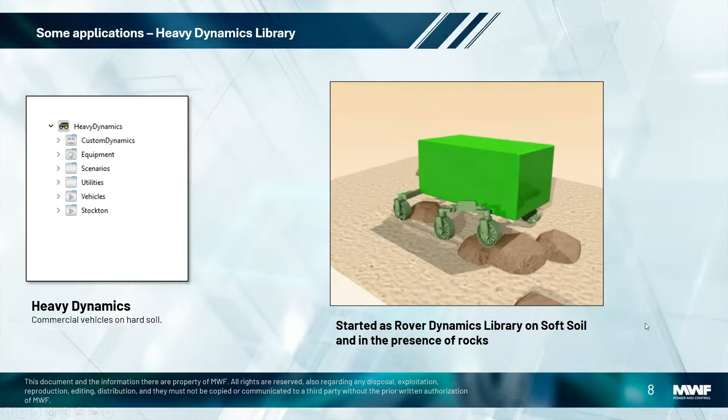First, a brief introduction about the Heavy Dynamics library. Currently, we use it to model and analyze and even design control systems for heavy vehicles. But originally, it was conceived to simulate planetary exploration rovers like this one that you see in the animation there. This is, in fact, an animation at that time.

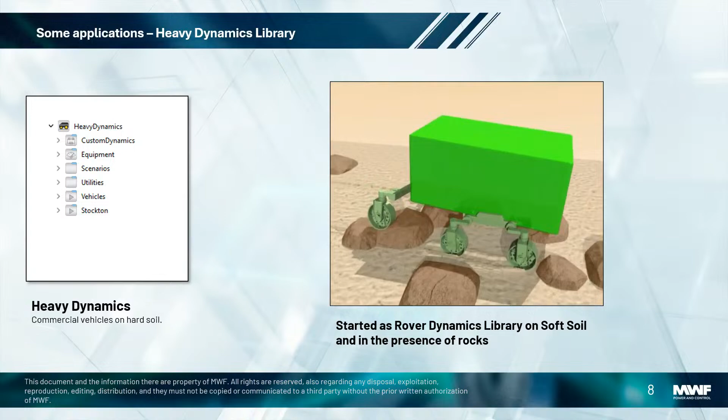It was developed in, the first version was developed in Dymola, but it runs in System Modeler, Open Modelica, and many other Modelica-based packages. And as you can see, it is able to reproduce the trafficability of a planetary exploration rover with many wheels in contact with soft soil, in contact with stones, many stones at the same time, producing tracks on sand, different types of sand, etc. Both sinkage, slippage, both lateral and longitudinal are able to be modeled and simulation in this library.

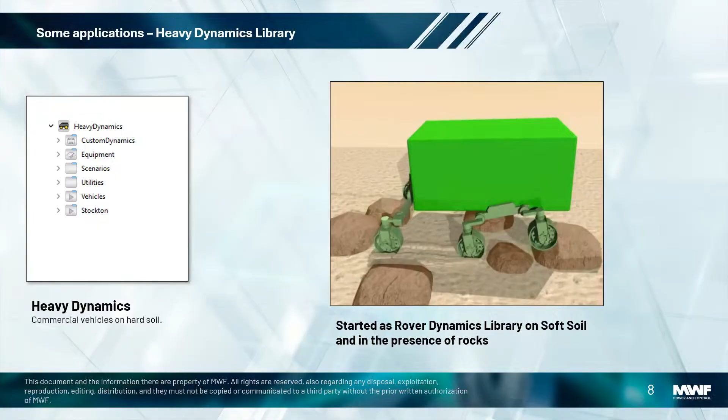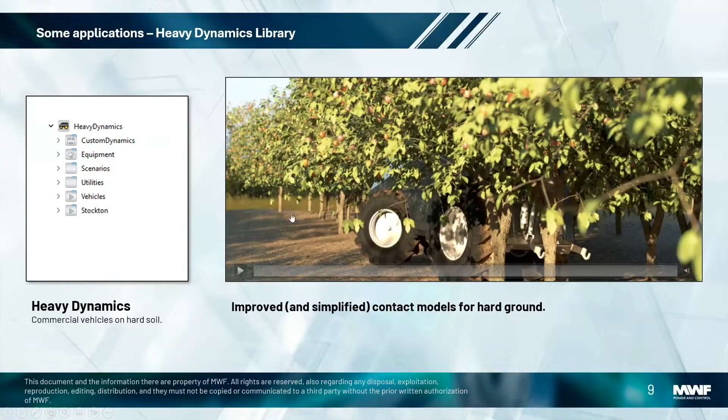This first version was very important to give us the basis for the development of the contact models, which are the most important features that we have in the current version of this library. Although it was originally conceived for both soft soil and hard soil, soft soil applications are not that frequent for us, and for this reason we further developed the library to work with hard soil only.

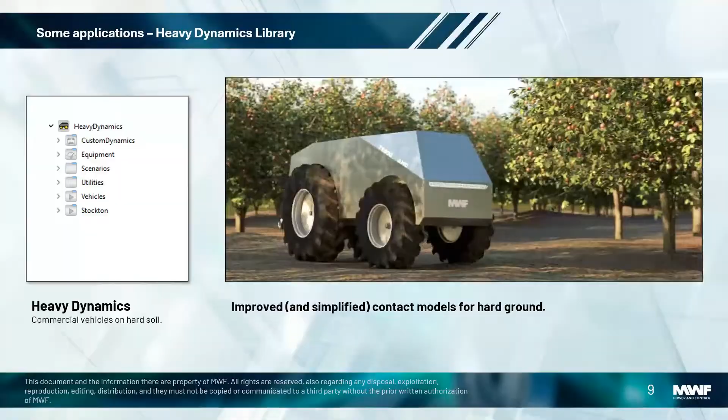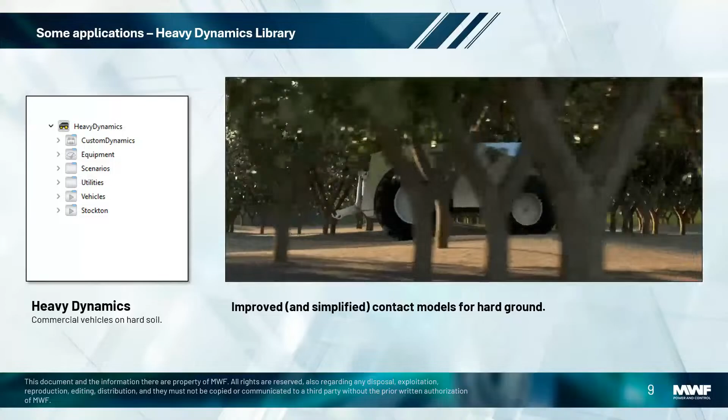And this is one of the most interesting applications that we have. This is an electric tractor, a four-wheeled vehicle. Although in many situations it would be interesting to simulate it in soft soil, it is entirely simulated in hard soil, and this is very useful for us to help us understand the dynamics of the vehicle, the power demand, how the power is demanded for every component and for every device in the power electronics pipeline, and how the motors are going to be demanded during the specific use case. So this is one of the applications.

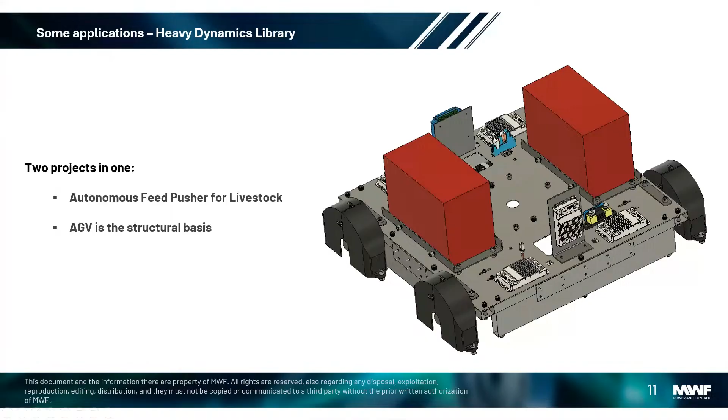In this situation, robustness assessment is very important, because the mechanical design, electronics design, and even the control design of the inner loops - current control of the motors, torque control, speed control, and so on - should run in parallel, and at the end they must work seamlessly in perfect harmony. But they are always considering models during the whole engineering design process. For this reason, robustness assessment is very interesting, and in fact one of the most important things we do with these models.

The vehicle is completely free - there is no joint defining its relative movement to the inertial frame. This means it stands basically on its wheels, and it solves the problem of static indeterminacy by considering a stiff contact between each wheel and the ground.

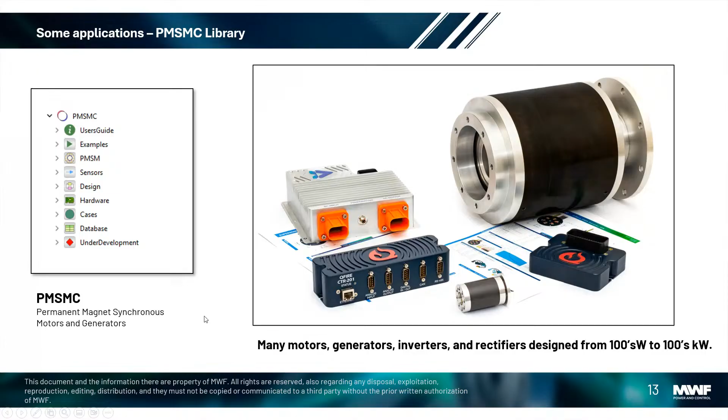The model of one motor works by considering the rotor as the plant to be controlled, a pure inertia with magnets in there, which interact with the electromagnetic fields generated by the stator. These items are modeled separately, and they are only able to run in a complete simulation once you put all these pieces together.

So looking into the details of one of these models, like this motor, you are going to see that the rotor, the stator, any aspect of the windings, the thermal model, and so on, are all designed in such a way that they only work if they are put together. As in the real case, this motor is not going to run if you don't have a closed loop for current, and subsequently a closed loop for angular velocity as well.

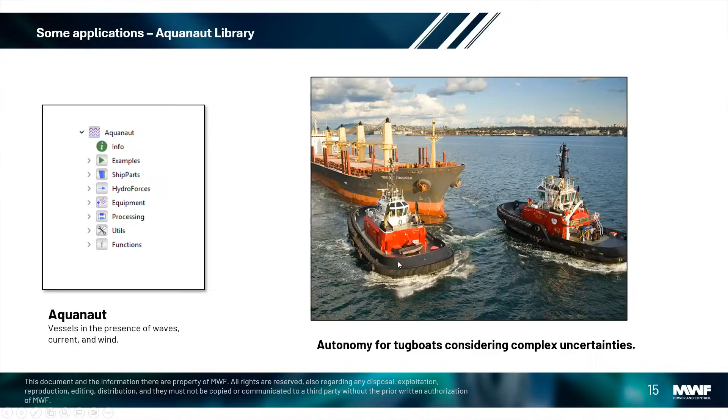Also, we have the models of the waves that are also provided as inputs for this model. We can see if the boat is floating just like expected according to the motion of those waves.

Just like in the other libraries, everything was based on a very concise and consistent basis of academic references. This one is mostly based on the works from Faltinsen and Fossen, but there are other authors as well that were used here to help us create the force models accordingly.

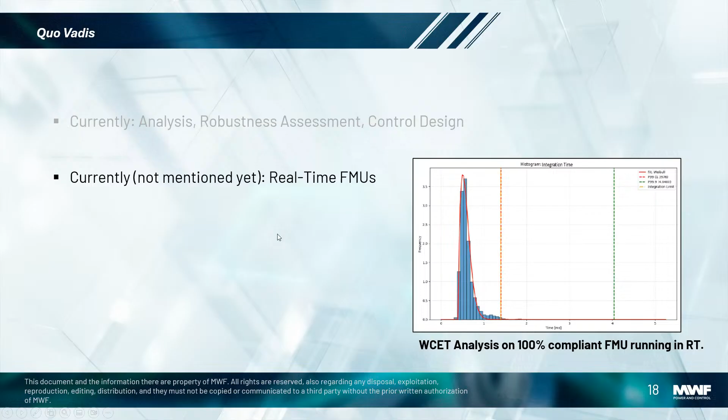And what we are seeking currently is deeper integration with Modelica tools, like for example System Modeler. This entire framework, as you could see, was used and validated in many different projects. And what we think would be very interesting would be to have these two more seamlessly integrated into some specific tools, in order to make it even more easy and straightforward to deal with. And that's it.